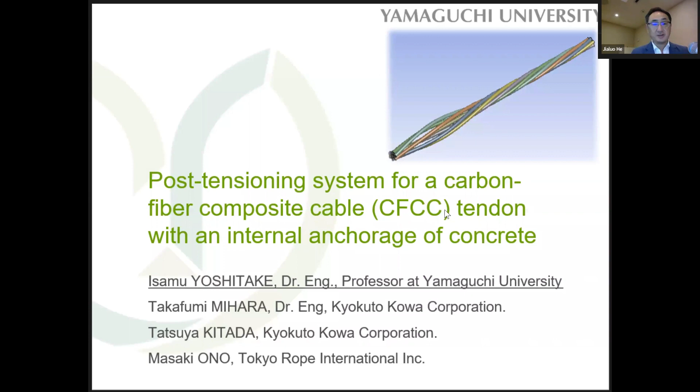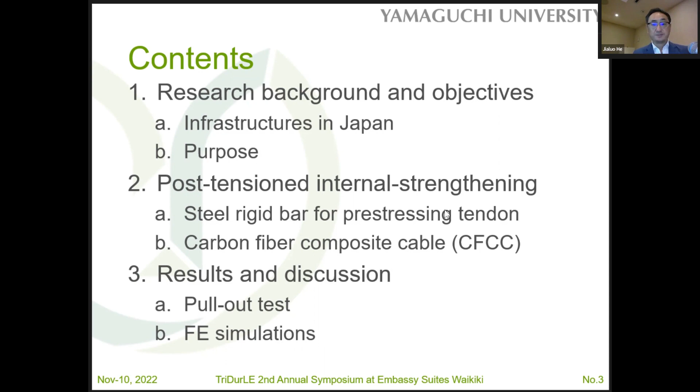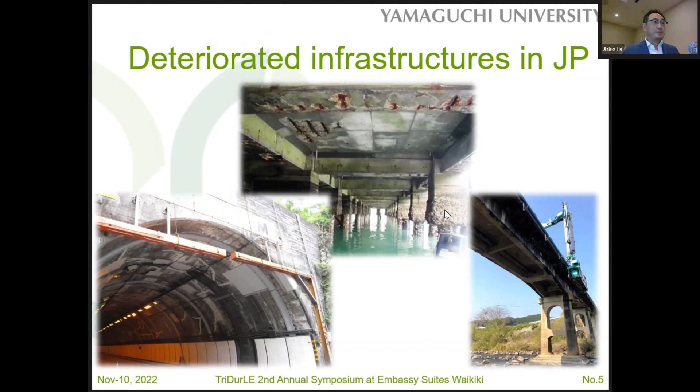Research background and objectives. As well as in the US, in Japan there are many deteriorated infrastructures.

According to the Japanese government, this graph shows the total number of bridges 15 meters or longer. Most of the bridges were constructed during the economic growth of Japan, such as the 60s to 70s, and now there are more than 140,000 bridges.

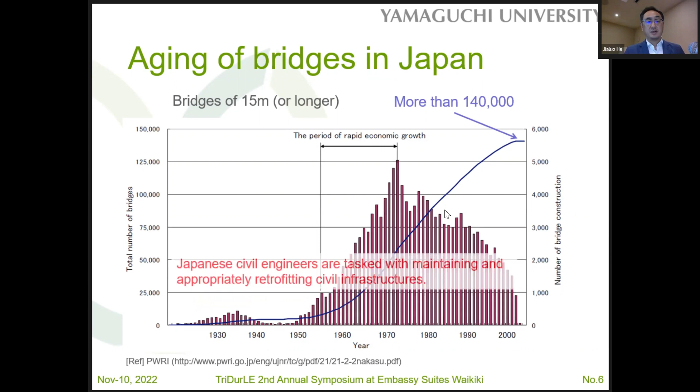So Japanese civil engineers are tasked with maintaining and appropriately retrofitting these structures.

Unfortunately, this is a typical accident involving old PC bridges in Japan, and this accident occurred in my hometown. This bridge was supported by 18 vertical PC steel bars, anchored in the bridge abutment. All the PC bars corroded, and some bars suddenly ruptured. The end of the bridge was uplifted suddenly, and unfortunately a car crashed at the uplifted section.

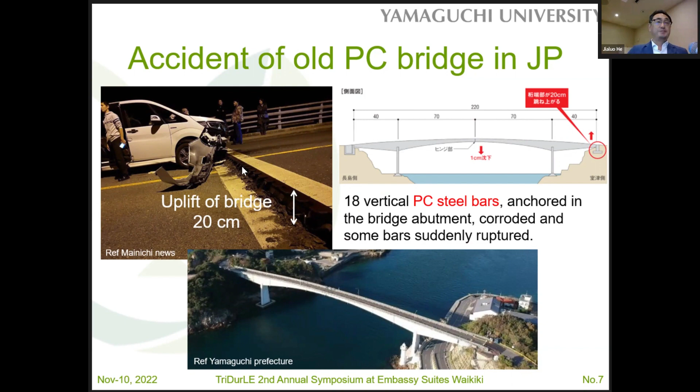This PC bar was supported in a straight hole grouted with grouting material. The post-tensioning bar and anchor bolt are generally fixed by grouting material, but mechanical anchorage is more reliable compared to the bond-type anchor. So we need to develop a mechanical anchorage system.

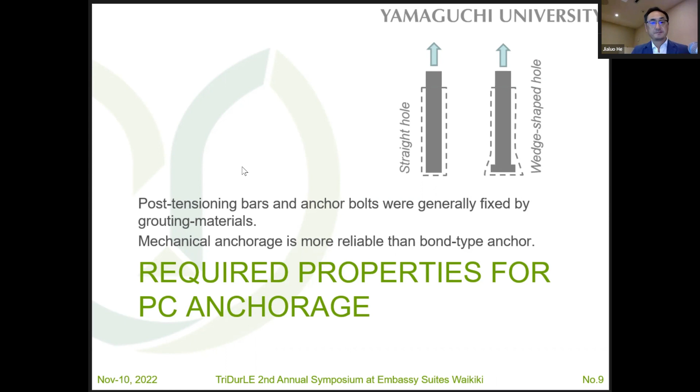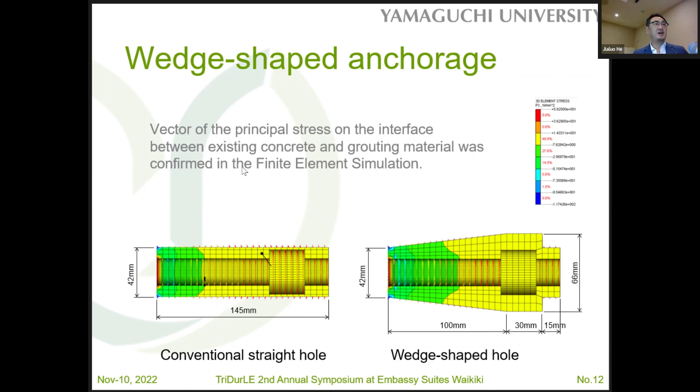So we developed a new mechanical anchor system for post-tensioning internal strengthening. The name is K-Plex method. As you know, compared to the conventional straight hole, a wedge-shaped anchor has higher resistance to pull-out.

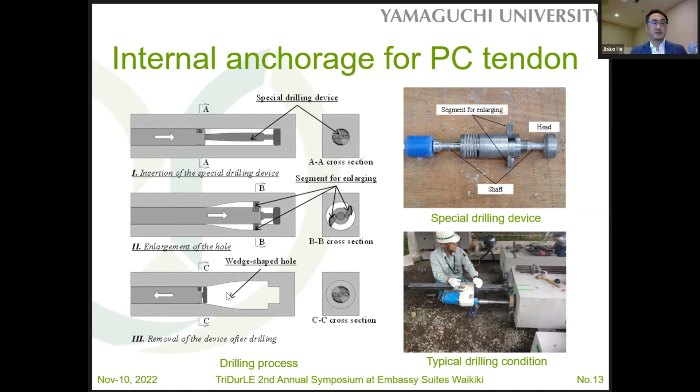This is the detail of the drilling tool for the enlarged hole tip. This drilling tool is equipped with a tapered shaft and head, which is pushed into the drill so the segment for enlargement appears here.

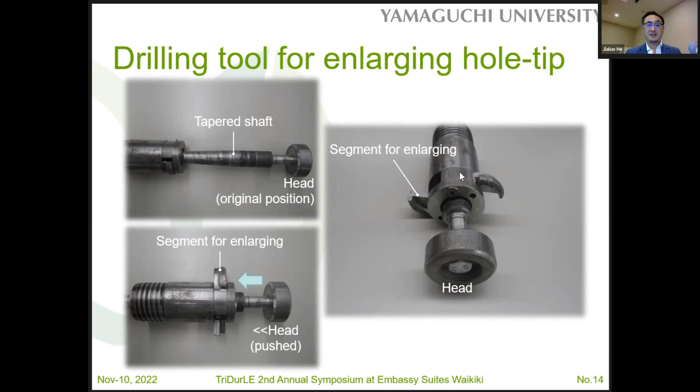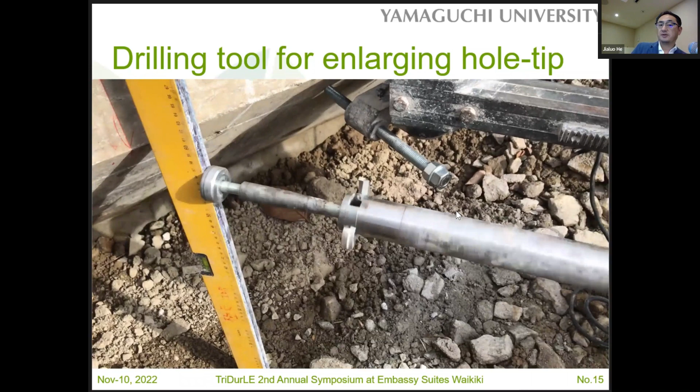I hope you can see the drilling tool for the enlarged hole tip in this movie. We can make the wedge-shaped hole by using this drilling tool—very simple. After drilling, the enlarged segment can be set into the drilling tool, and of course we can remove this drilling tool.

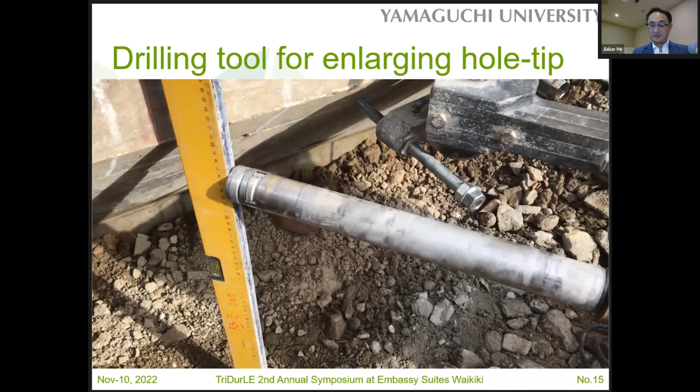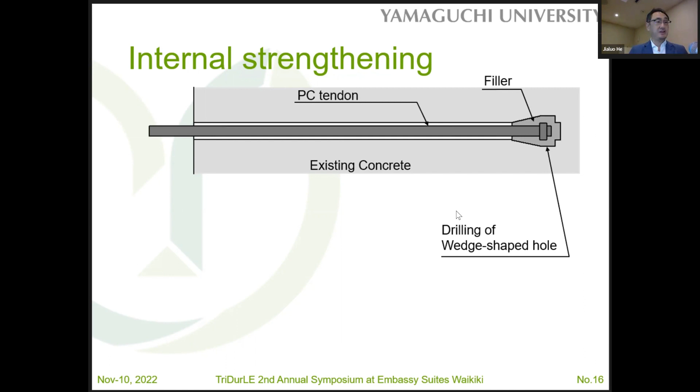Again, I'll show you the internal strengthening system. We make the straight hole and drill the wedge-shaped hole, grout high-strength mortar as a filler, and insert the PC tendons. Here is the internal anchorage system. After that, tensioning provides the pre-stress to the concrete member.

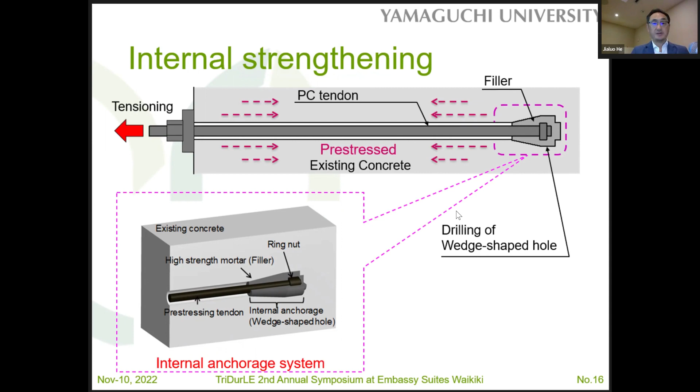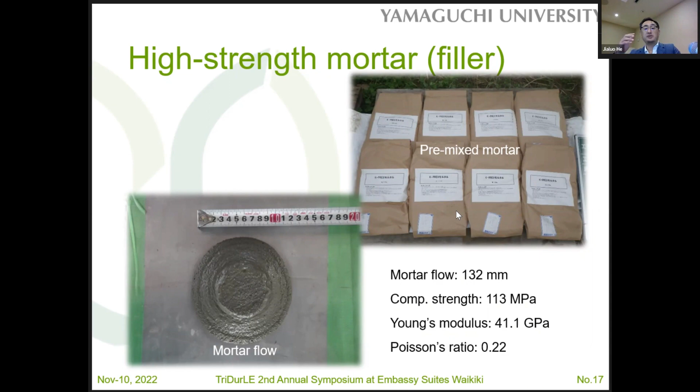This slide shows the high-strength mortar used in this system. This high-strength mortar has a strength of almost over 113 megapascals—it's very high-strength mortar.

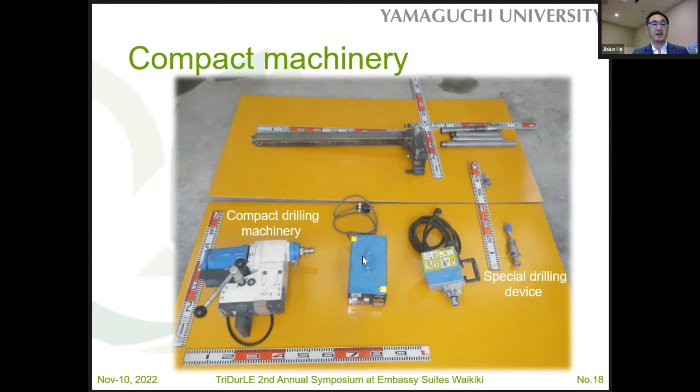The unique feature of this system is that it uses only very compact machinery—this drilling device and compact machinery. Of course, this system can also be used for jointing new and existing concrete members.

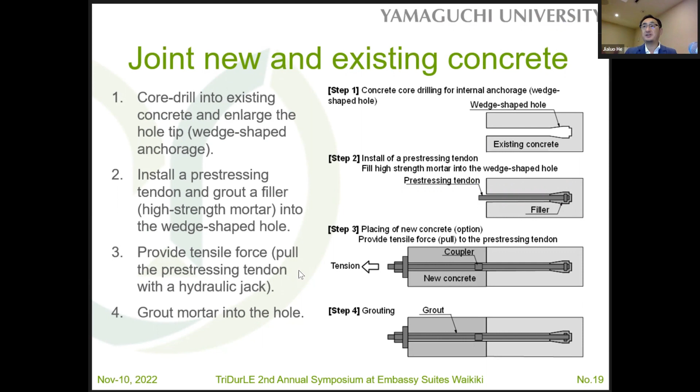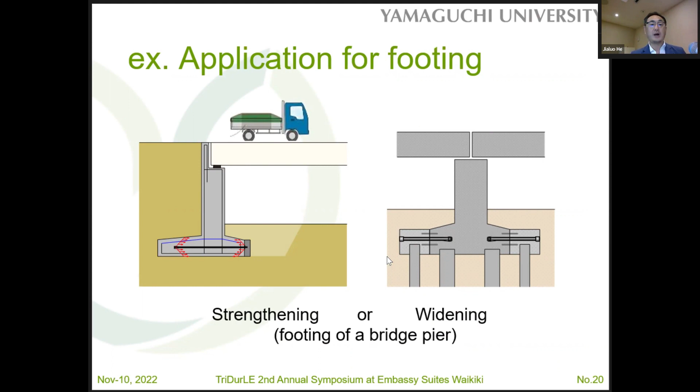This is a typical application for this system, for example strengthening the footing of a bridge pier, or widening of the bridge pier footing.

Now we are trying to use this system for applications on bridge decks, for example widening the slab by using this system with post-installed anchors and PC tendons. The concrete joint from this system may be much more durable compared to conventional jointed RC structures.

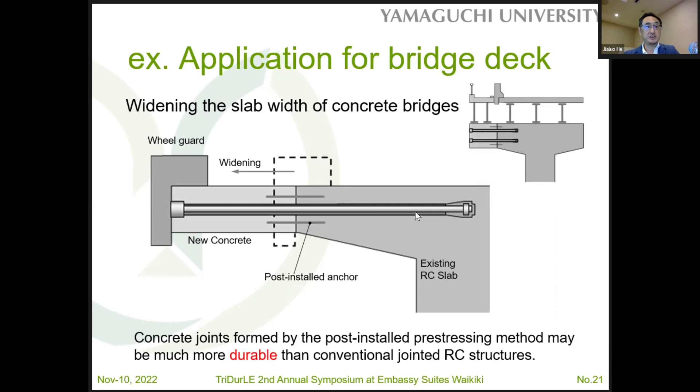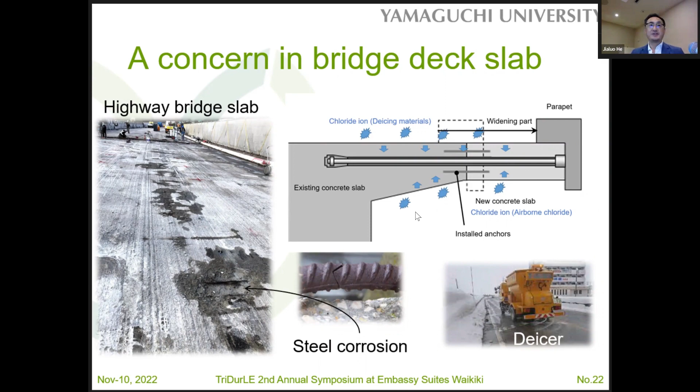However, as you know, bridge deck slabs are subjected to chloride attack due to de-icing material, so we need to reduce the risk of corrosion. So we focus on the carbon fiber composite cable, CFCC, as a pre-stressing tendon.

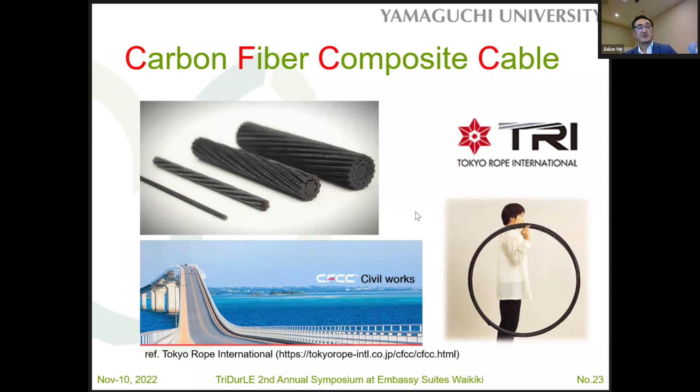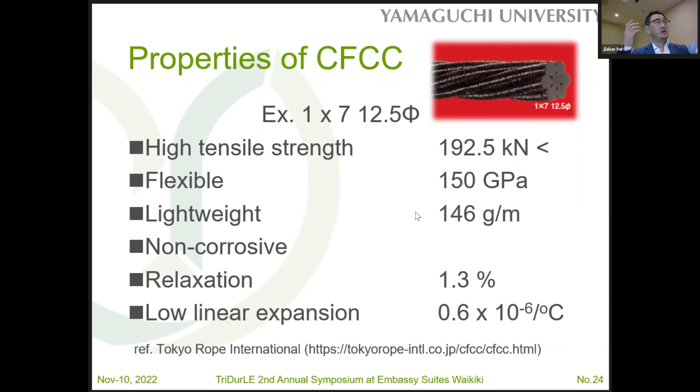Perhaps the CFCC is very famous in this country, I think. The CFCC is provided by Tokyo Rope International. The mechanical property of CFCC is shown here: it has very high strength, almost 200 kilonewtons, and it is flexible, lightweight, and non-corrosive.

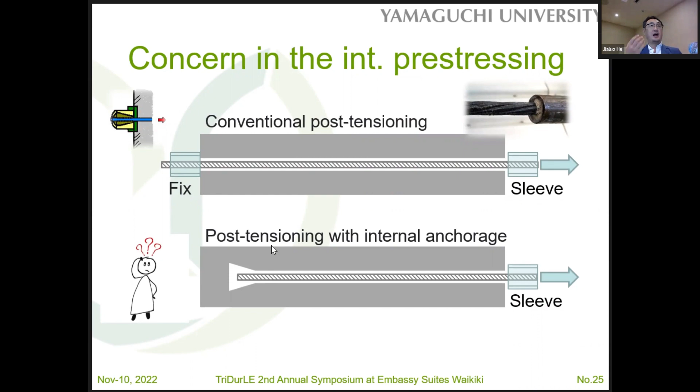But another concern appeared, because in the conventional post-tensioning system we can grip both sides of the PC tendon. In the case of the internal anchorage system, we cannot grip this side, so we need to find how to grip these PC tendons.

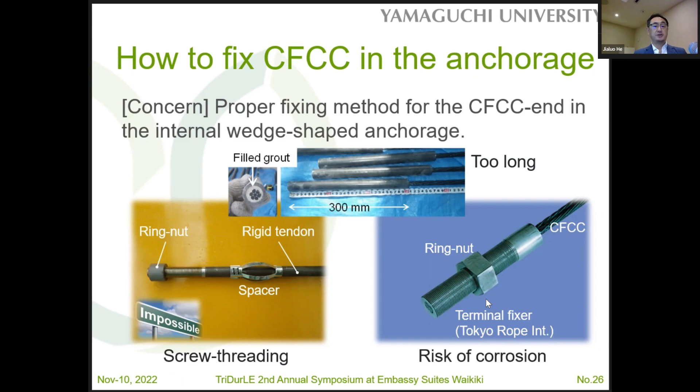So the problem is a proper fixing method for the CFCC end in the internal wedge-shaped anchorage. Of course, the CFCC cannot be applied with screw threading, and if we use the steel tube or terminal fixer provided from Tokyo Rope International, these are steel materials, so it has a risk of corrosion.

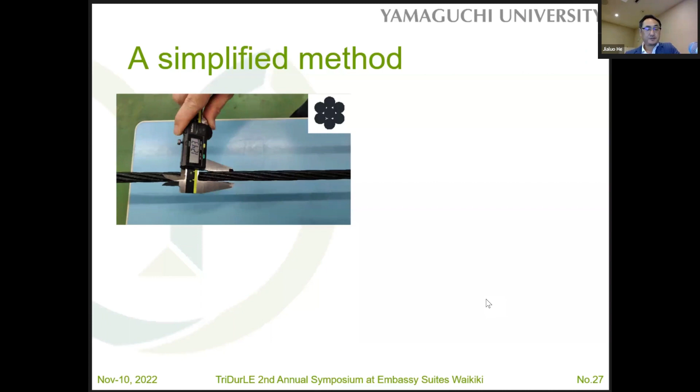So finally, we found a very simplified method. The CFCC consists of 7 wires. So to enlarge the diameter of the CFCC end, the 7-strand cable is reversely twisted. Just reversely twisted, but it increases the enlarged diameter.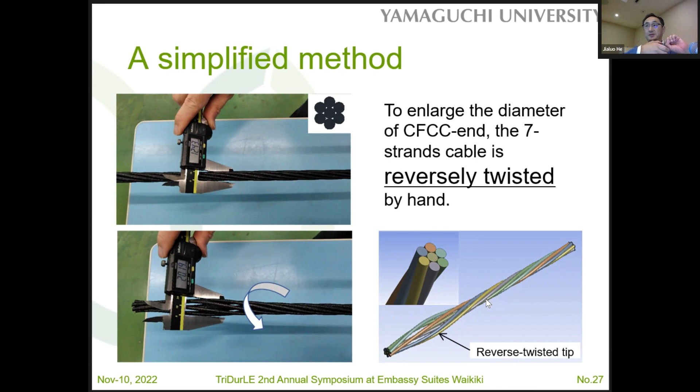So this is the concept of the CFCC in the wedge-shaped hole. These are reverse twisted tips inserted into the internal anchorage, wedge-shaped anchorage.

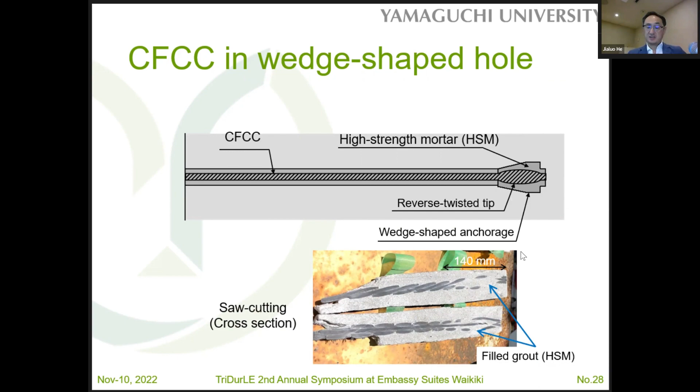So hereafter, we conducted a very fundamental experiment, the pull-out test, to determine the interval of the CFCC tendon or the minimum thickness of the RC slab. We used two kinds of specimens, 200 millimeter square and 150 millimeter square.

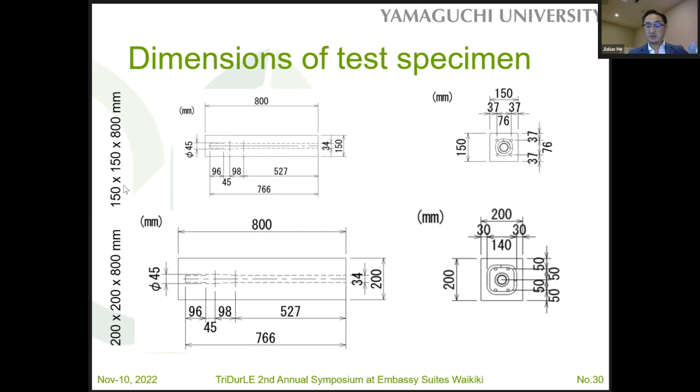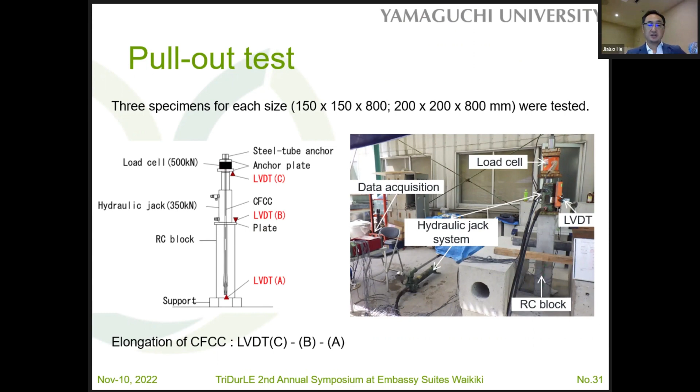This is a pull-out test used in my study. Three specimens for each size were tested. This is the pull-out test system, and here shows the pull-out test for CFCC tendons.

So to provide the tensile force, we can grip by using the steel sleeve. This is not internal anchorage. Internal anchorage is here, and this is... sorry, no sound, but you can see this is the pull-out test.

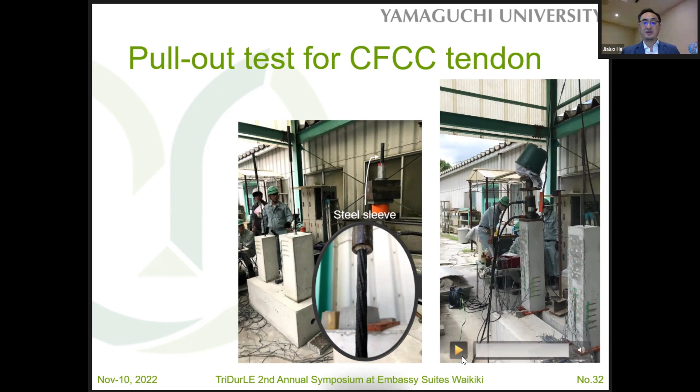Okay, and we confirmed full grouting in the enlarged CFCC tip. This is a loading program, and we observed the Pmax maximum load.

According to the manufacturer, Tokyo Rope, the guaranteed load capacity PU is 192.5 kilonewtons. But Pmax is the test value. In case of the 150 millimeter specimen, the average value is lower than 0.95 PU, but for the 200 millimeter square, it has a higher value than the guaranteed load capacity.

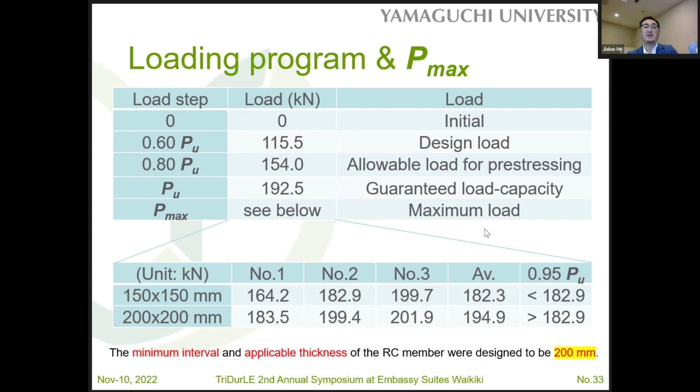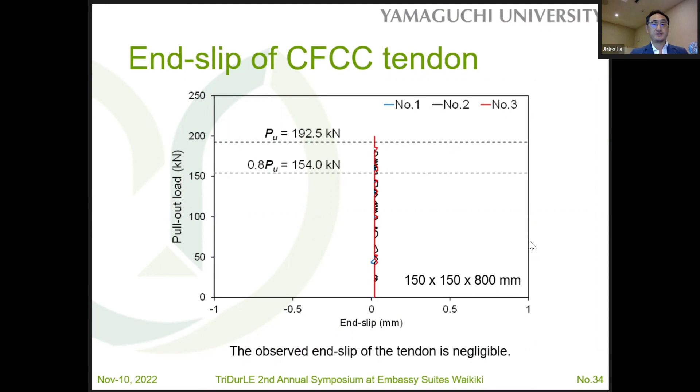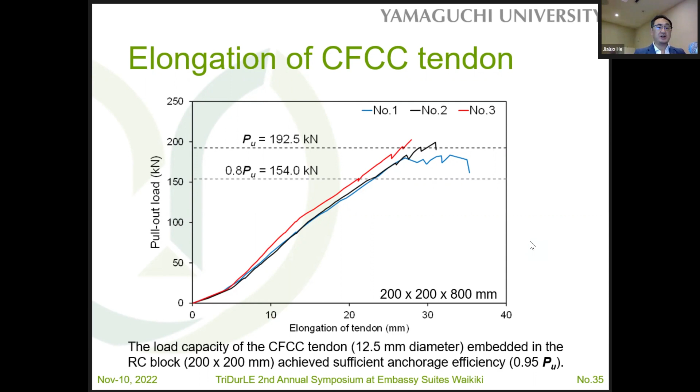And this slide shows the elongation of CFCC tendons. The load capacity of CFCC tendons with a 12.5 millimeter diameter embedded in the internal anchorage achieves a sufficient anchorage effect.

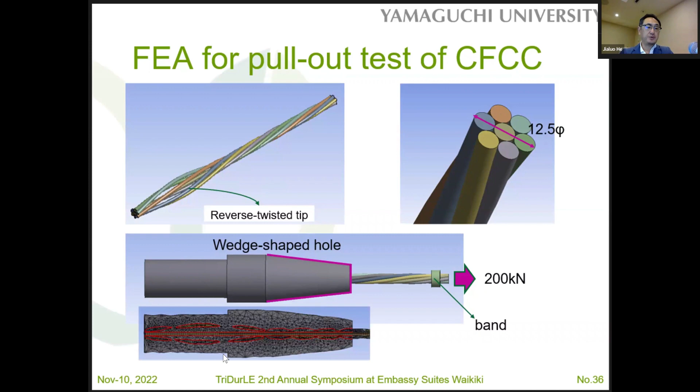And to confirm the stress distribution inside the reverse twisted tips, we performed FE simulations. Here is the reverse twisted tip, and here is the wedge-shaped hole. Here is the FE mesh and FE modeling for the CFCC pull-out test.

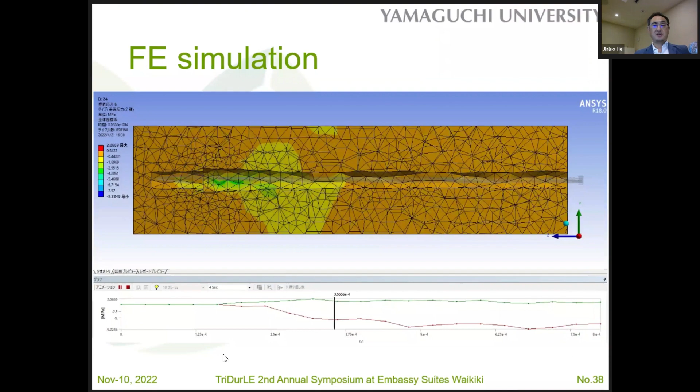These are the FE simulations here. These are the cross-sectional views of the CFCC tendons. These show the stress distribution inside.

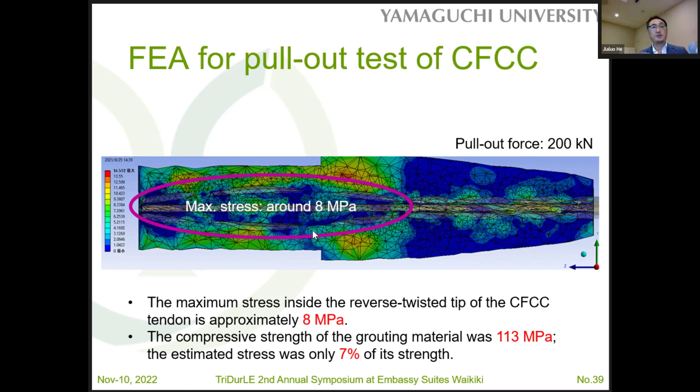The maximum stress is around 8 megapascals. Again, the compressive strength of the grouting material is over 100 megapascals, so the estimated stress was only 7% of its strength. So we confirmed this anchorage system can be used for the internal strengthening system.

So I'd like to conclude my presentation. First, the load capacity of the CFCC tendon embedded in the RC block achieves sufficient anchorage efficiency. Second, the minimum interval and applicable thickness of the RC member were designed to be 200 millimeters. And the combination of the wedge-shaped hole and reverse twisted tip of the CFCC tendon is adequate for anchoring. Lastly, the post-tensioning pre-stressing system using the CFCC tendon can be applied for strengthening RC members. Thank you for your kind attention.

Very interesting concept. Simple. Very simple.

The length is, sorry, let me show you where. Sorry, the length is almost 200 millimeters, 20 centimeters, and the diameter is 3 times that of the CFCC, for the wedge shape, sorry, the reverse twisted tip. 20 centimeters? Yes.

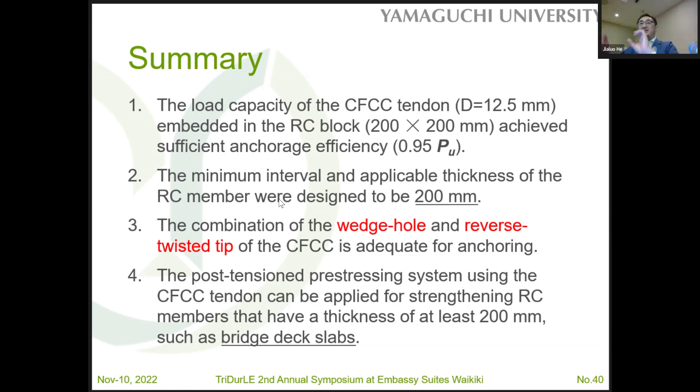Depending on the CFCC run. So let me show you here. Sorry, I cannot use this, so from here to almost 20 centimeters.

And this one can be used for new construction? Yes, but of course it can be used for new construction. Our goal is to strengthen existing concrete — this is the first purpose. But the second purpose, of course, we can use it for new construction as well.

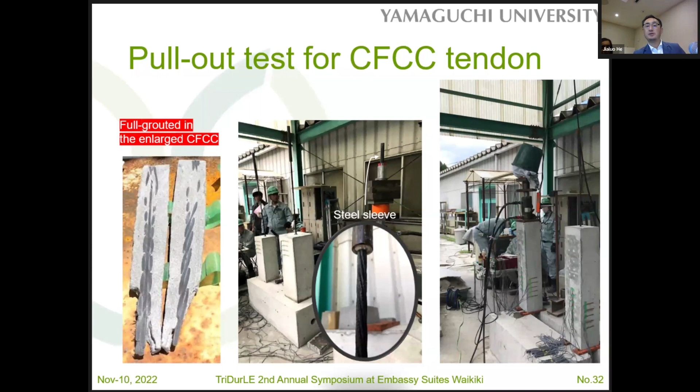Sorry, finished. The chat is here. Sorry, no problem.